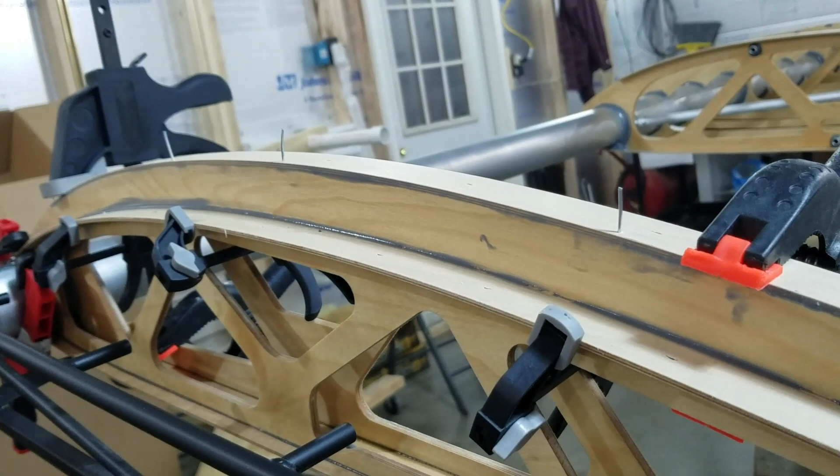So instead of changing the windshield and all that, they just transition down to it, and then the butt rib goes in here, and your windshield is this height right here, just like it was sitting on top of the standard wing. But this will be the top of the wing on the STOL wing. That's why you go slower, because you're pushing more wing through the wind. You get to land slower, and you get to travel cross country slower, both. You lose it on both ends.

I just took some baling wire, or electric fence wire. We drilled holes, a 1/16 hole. It fits our wire just fine. This has to be flush right here, so we just drilled small holes in here. If you can see the small holes, we drilled into the next piece below it, and we stuck those down into this about 1/4 inch, just to hold it stable. We'll take them out when we're done. That keeps that from being able to move in and out on me while the glue is drying.

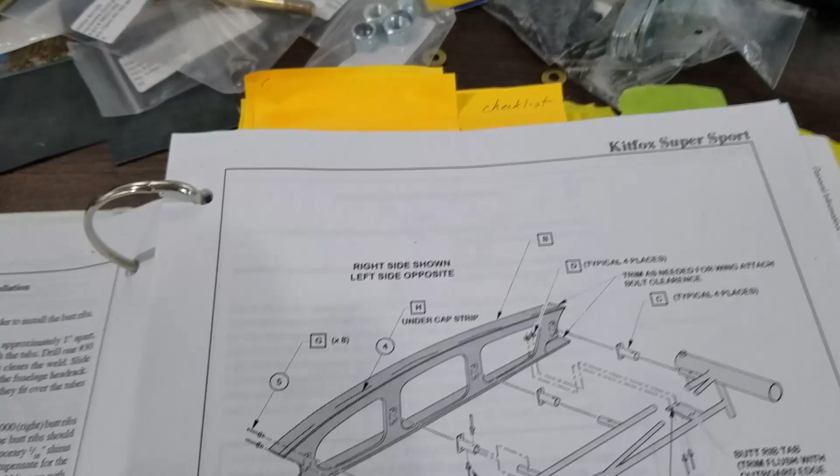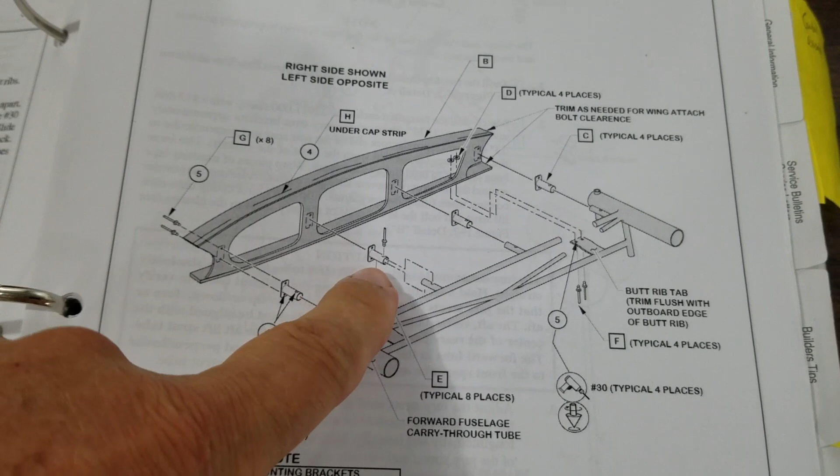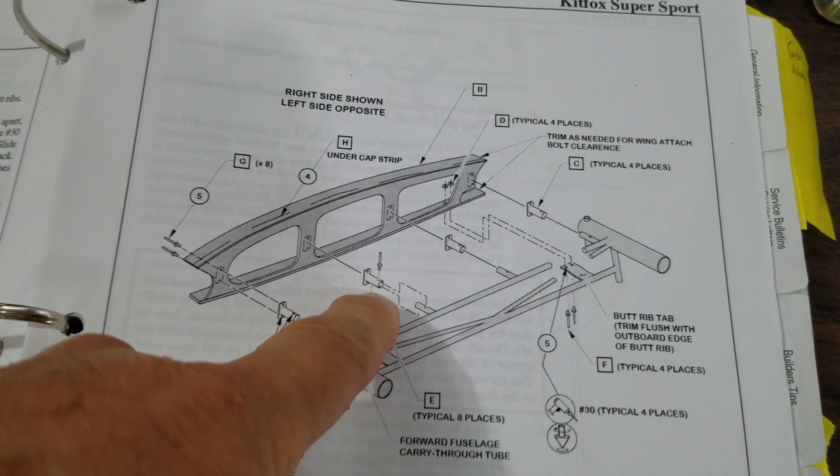Okay, working on the butt rib brackets, working on the mounting brackets themselves right now. As you see, there's a rivet top and bottom. This is what they look like. I've drilled the top and bottom holes. I have clecoed them to the butt rib itself, and now I'm ready to drill these two rivet holes here.

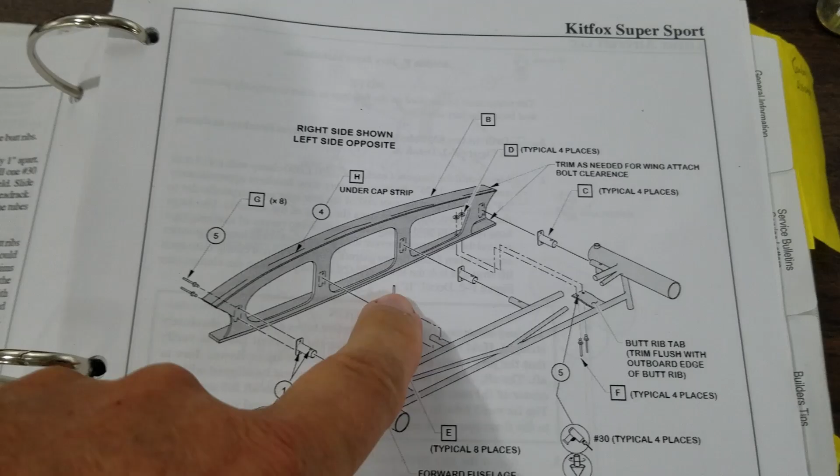Okay, on these mounts for the butt rib, you have to drill 2 holes, of course, there, and then you have to drill 2 holes here. It's really hard to drill a round piece of pipe, so we drilled a 1/2 inch hole here, and then we had to die grind it out just a little bit with sandpaper to make them where they slipped in here. And then we marked our holes. After you put them in there, we have the holes marked, the top hole and the bottom hole.

Now vice versa. This is the top hole and this is the bottom hole. So we drill one, and then we spin it over like that and drill the other one. And that gives you your one hole on top and your one hole on bottom, and makes it real easy to get them in the right place. And they drill easy.

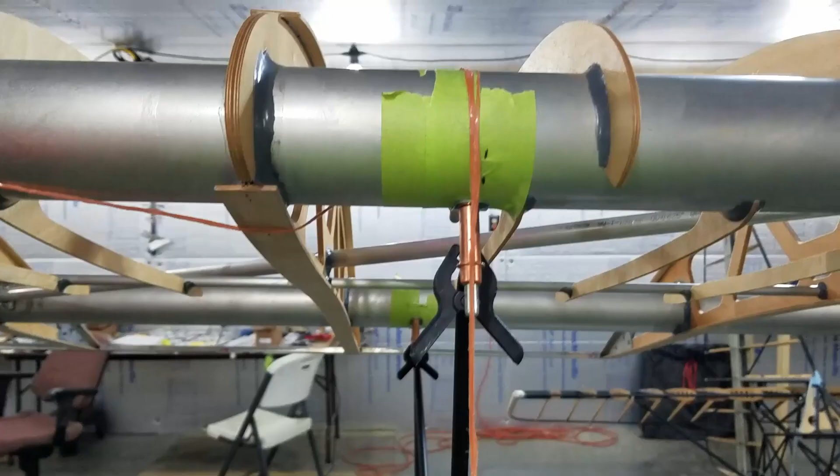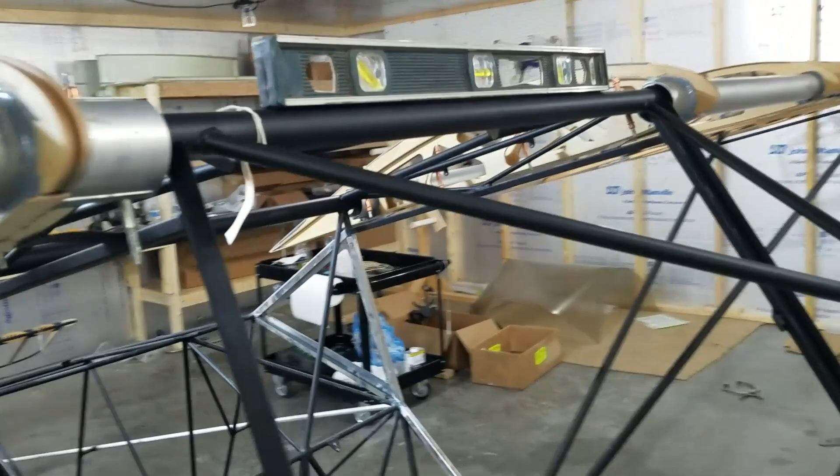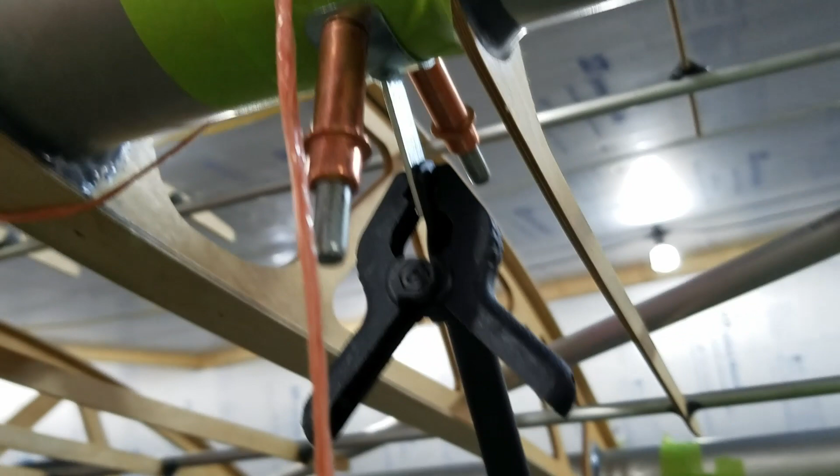Okay, we're hanging the butt ribs today. You're supposed to line them up with a plumb bob after you level the frame. Make sure it's level, and then you can use a plumb bob to make sure these are in the right positions. And once they are, then you drill holes, cleco them in place, and then those will be riveted and glued. These will be measured and marked, and keep the number somewhere when we put them back together.

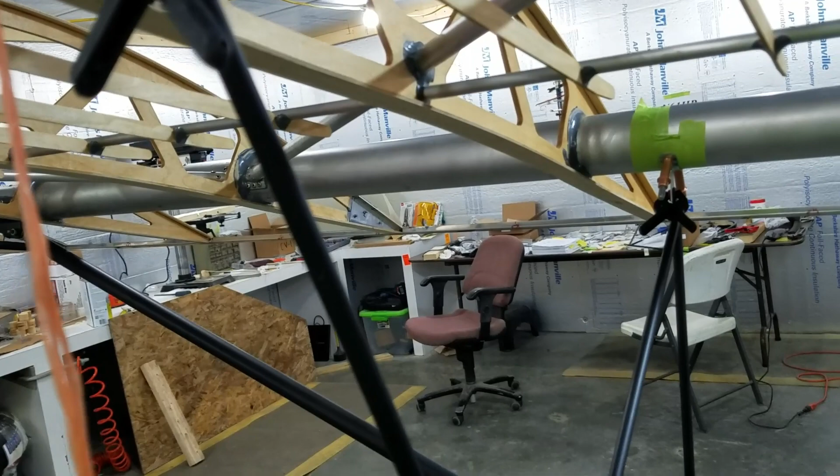It's just follow the book. It's pretty self-explanatory. Only take you 6 tries.

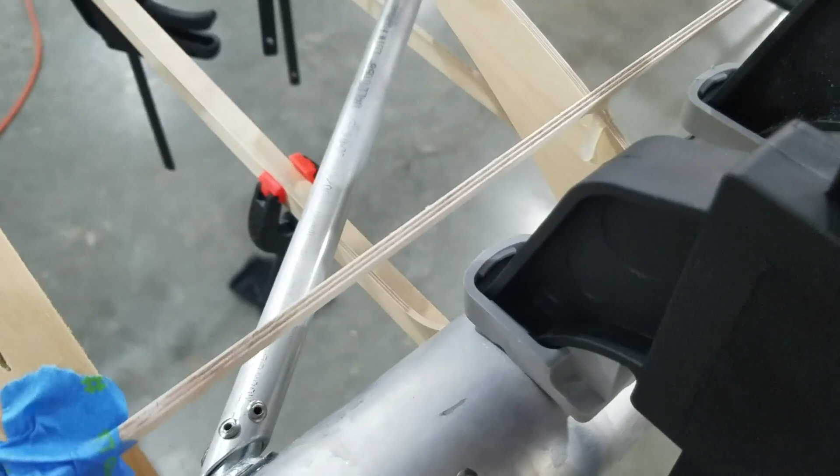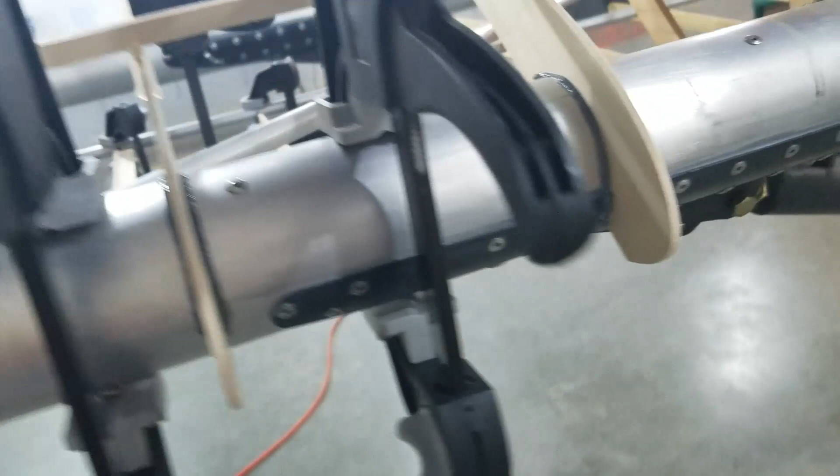Okay, after we put the struts in, we have to put the false ribs in. This will hold the covering. Well, really, it'll hold some. It gets covered all the way up to here with a leading edge fiberglass, and then it just holds the airfoil shape. We couldn't put them in while we were working on the lift strut bracket and all that stuff, so we've got them temporary in place, hopefully.

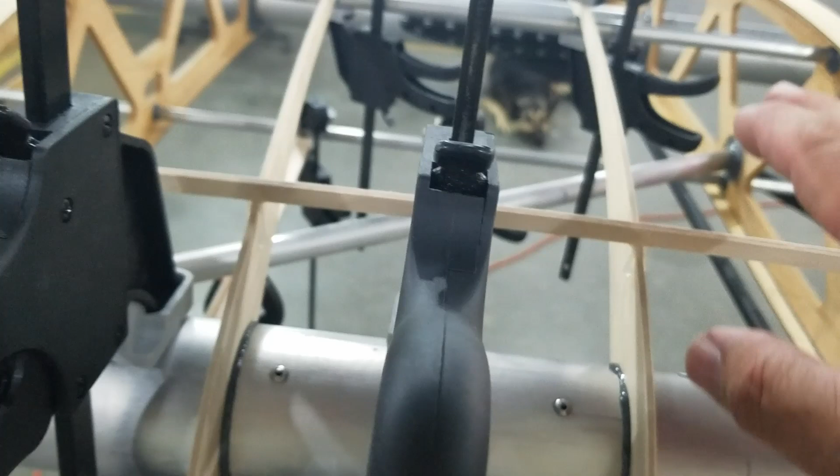As soon as they glue, then we have to put a big fillet of glue like this on them. We'll do that after they dry, set them. Just kind of hard to get those to stay in place. I finally got my hot glue out and put a brace all the way across here and hot glued them. After I couldn't get them to stand up straight, I couldn't figure out how to clamp them right.

It just wasn't cooperating. So I finally got the little clamps to hold up here, and then I used this plywood across here and used some hot glue on it. Just hold them in place, hopefully, till that sets up, and then I can put the big glue fillets on it.

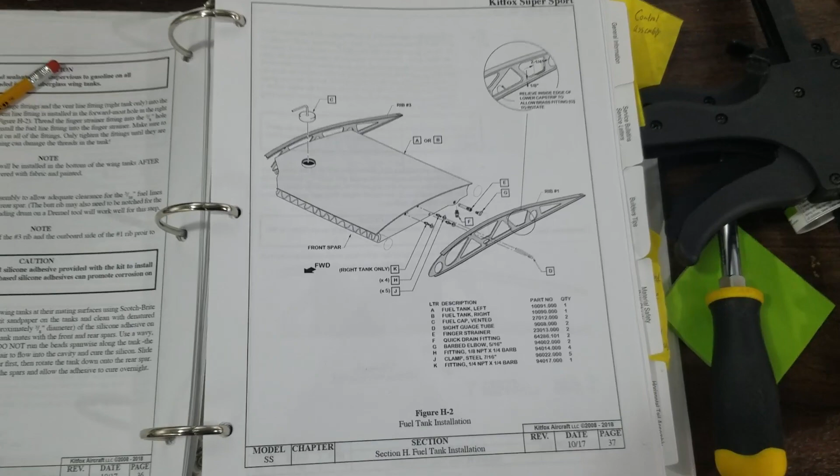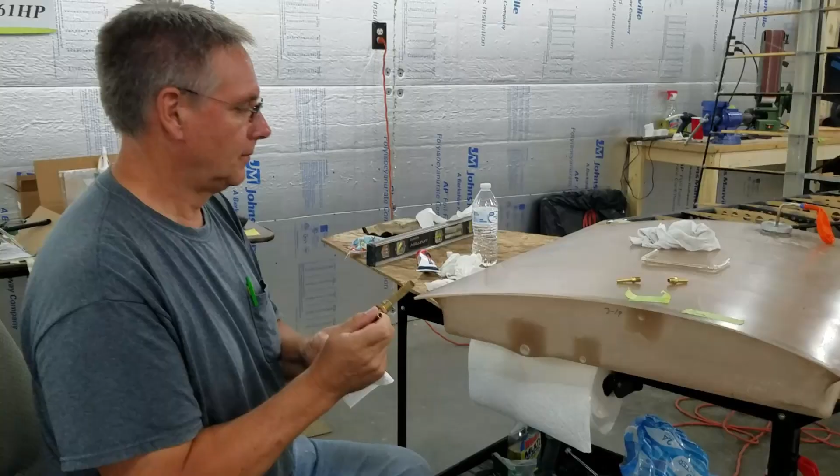Time for the fuel tanks. Yeah. This is the hard one. It's got to end up pointing right there. You're not supposed to over tighten the fittings. So you know it's going to end up like right here or somewhere. Happens every time.

What a day. Oh, it's not too bad.

I believe you want that one just down, just not level, just a hair down. That's where you want that one. And the rest of them just get glued and put in.

You can pause it now.

Okay, we got it all plumbed up. Now we're going for our second pressure test. We're checking for leaks now. We already checked the tank for leaks. Now we're checking for any leaks around the fittings we just put in using soapy water. If you get any leaks, it will bubble up.

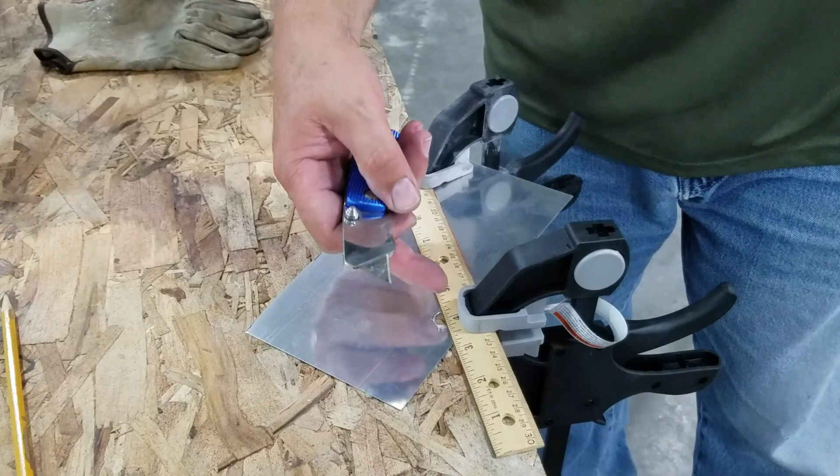Video. Now what do you want me to do? Take pictures of this. This is our fuel tank placard. You have a plastic tube that runs from here to here. Shows you your fuel level, and this will be marked in gallons up here. And we have to cut this in two to be able to get it onto the two tubes. So we're going to try this method here of cutting it and see how it works.

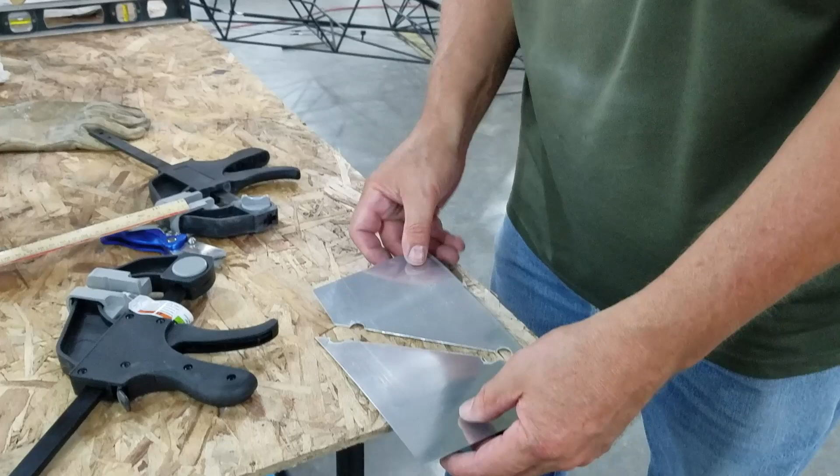There you go. Two pieces that fit back together. This has plastic on it. If you see the imperfections there, it has a plastic cover that has not been taken off yet. Bring it over here.

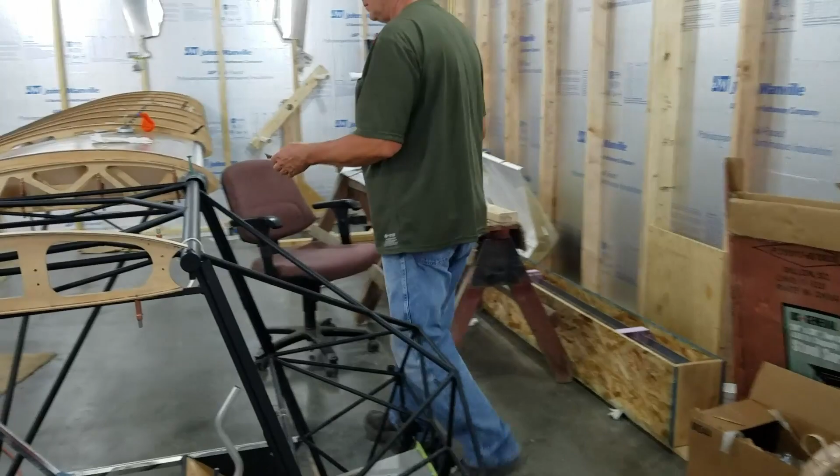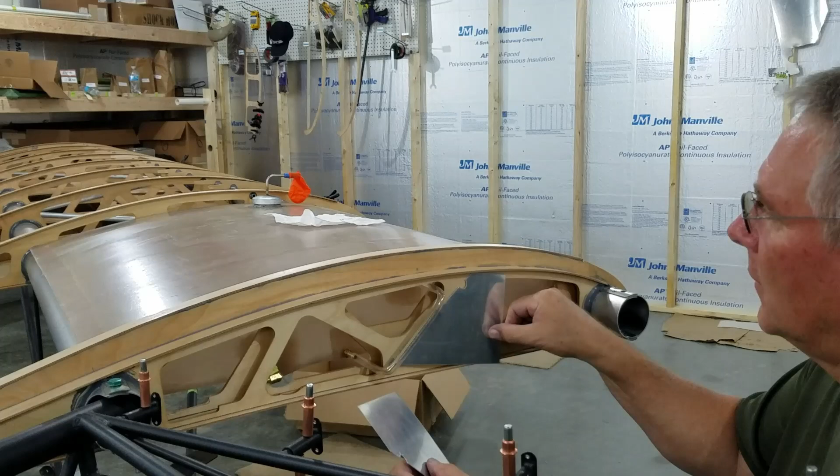Hose goes in there. This is the actual fuel gauge here. It's not on all the way, but I'm just showing you how everything's gonna fit. Maybe get the right way. This will be on there, and then you'll have to put this on there afterwards. That's why it's split. And it'll have a placard.

You'll have a placard on it with your fuel levels, which will read this tube. And now I have to screw that on there to finish it up. Just need gas. Well, maybe a motor would help. Covering on the wings. And we're almost done. Not.

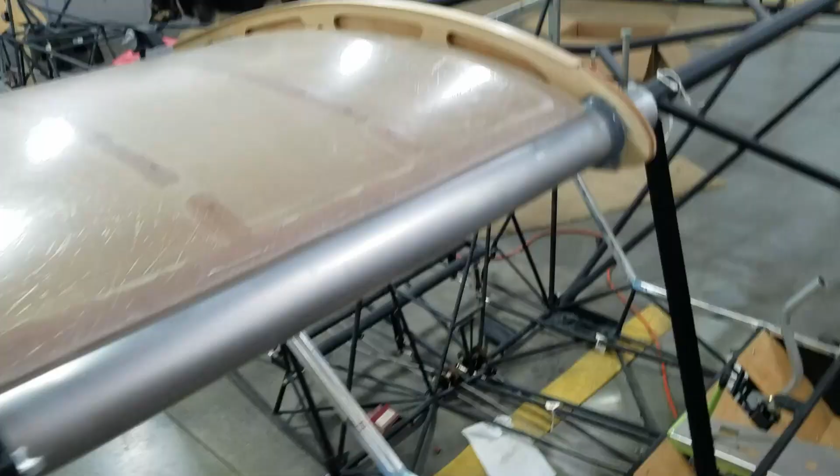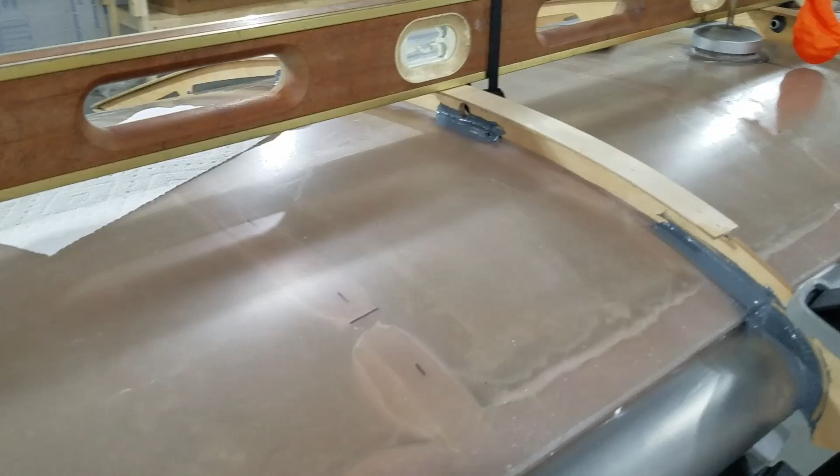We've got our tanks to put in. Been working on the back for the gauge, the placard area. We are gluing the false ribs on this one right here. We've just glued the middle false rib. Several more to go. It'll match all these here that laid on top of the tank.

This tank we just set in there with the glue on it. It's setting up as we speak. Be ready for tomorrow night. Getting her done.